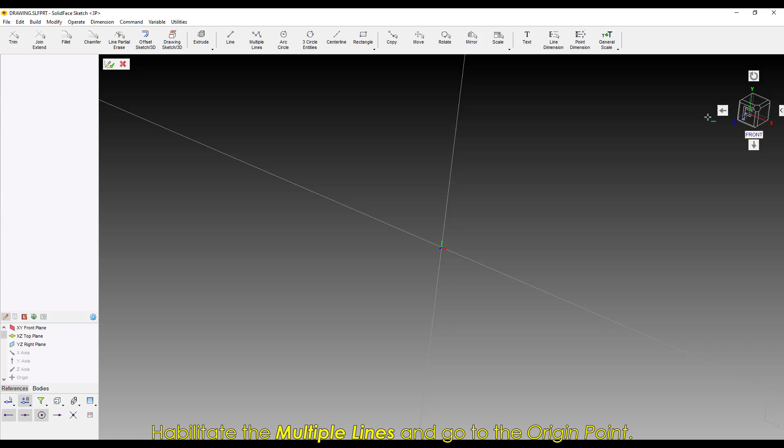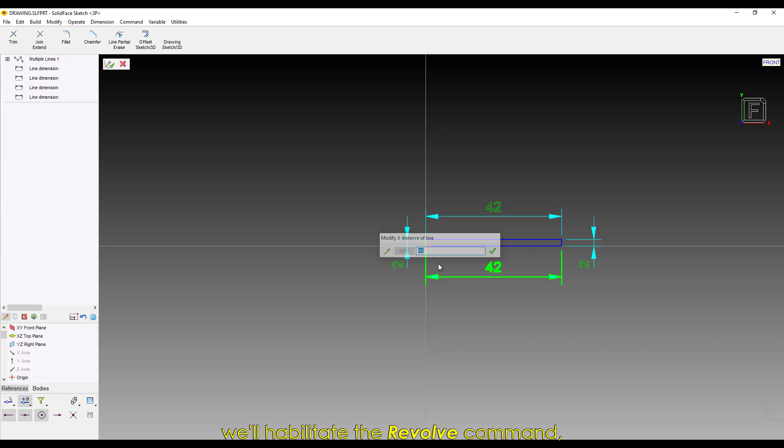On the Y-axis, we'll add 2 as the measure. Then on the X-axis, we'll add the part's length, which will be 42. Now we'll add 2 as the measure again and close the geometry. After finalizing the sketch and confirming the dimensions, we'll enable the revolve command. Select the part's axis to be rotated and select any of the geometry's lines.

To round it, we'll enable the fillet command and we'll select 2 of the edges where the operation will happen. Then we'll add 1.5 to the radius. To finish this first part, we're going to color and material, and we'll alter its material to carbon steel. Now we'll model the handle.

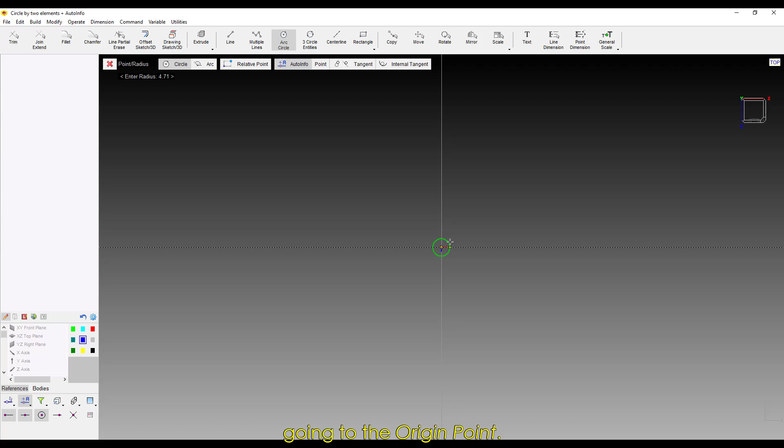As we drew our pin using the revolve command, let's change it up a little bit and draw the handle a bit differently using extrusion. First, we're opening a new part file, activating the XZ plane, and enabling the arc circle, going to the origin point. We'll add 4 as the radius value, and with the sketch still active, we'll enable the extrude command. At the distance field, we'll add 100 as the length.

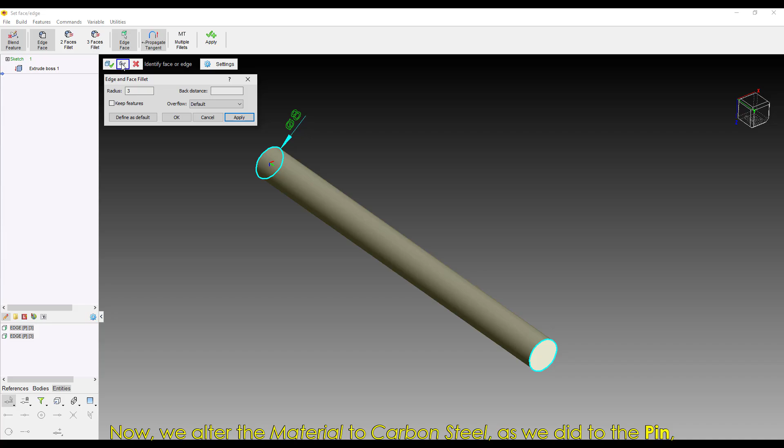To round it, it'll be the same as we did to the pin, using the fillet command. However, the radius will be different, with 3 as its value. Now we alter the material to carbon steel, as we did to the pin, and we'll finish this second part. Okay, so far so good, and now we're moving to the last part of this video, the bottom stop.

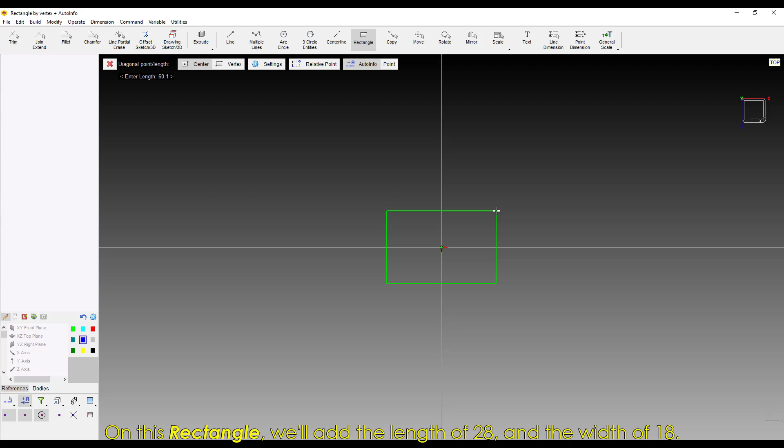Open a new part, enabling the XZ plane and the rectangle command, selecting the option center, and go to the origin point. On this rectangle, we'll add the length of 28 and the width of 18. Then we'll enable the extrude command, adding at distance the part's thickness of 4. Just like we did before, we'll round it using the fillet command, selecting those 4 edges and adding 9 as its radius. Now we need to add the hole.

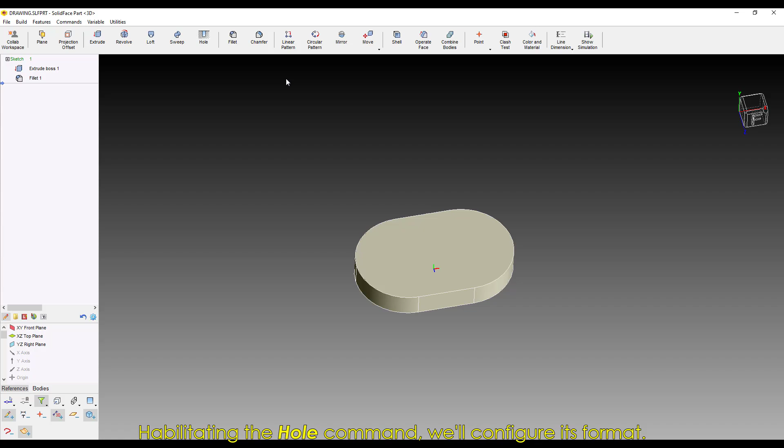Enabling the hole command, we'll configure its format. At type, select the option countersink. At diameter, add the value of 14, and at diameter 2, 8.4, at angle 90 degrees. Last but not least, we'll set the depth of the hole, inputting 4 as its length, which is equal to the thickness of the part.

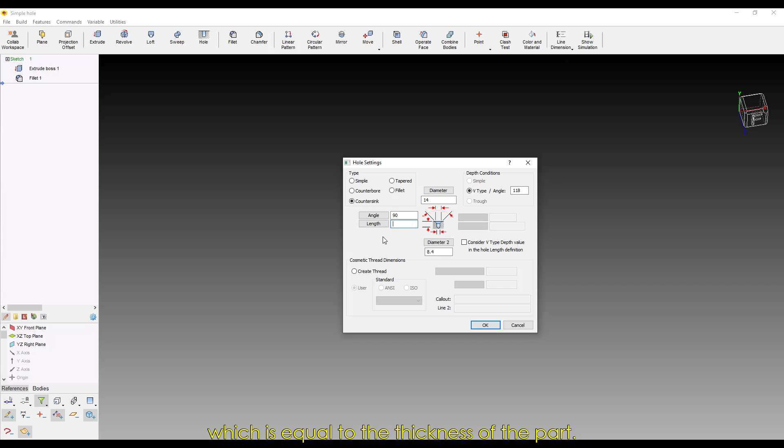After confirming it, we'll select the face where the hole starts, then the center of the hole, which can be done with the help of O-snap on the option Center of Face. To finish this part, we'll alter its material to carbon steel, like the others, and our bottom stop is complete.